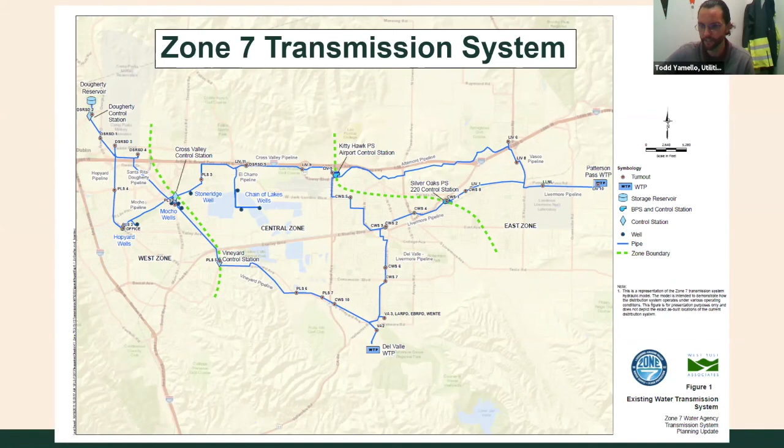So the next slide I have here is the city's system. You can see the red dots here are the 7 turnouts that Zone 7 delivers water to our system. The table on the right kind of tells you the percentage of water that comes in each of those turnouts. And then we also have our 3 wells, well 5, 6, and 8, and we have the percentages there, which also tie directly into our system.

You could tell T1 and T2, we very rarely use those. They're just not needed for us hydraulically. They don't deliver much water in our system. T2 we will bring on in an emergency. The majority of our water comes from T3, 4, 5, 6, and 7. You can see they're just kind of spread out through our system. And then our wells 5 and 6 are on Santa Rita, and well 8 is actually in our operation yard. So this kind of gives you a feel of where water comes in, and the percent. You could tell it's pretty evenly distributed, as you would imagine.

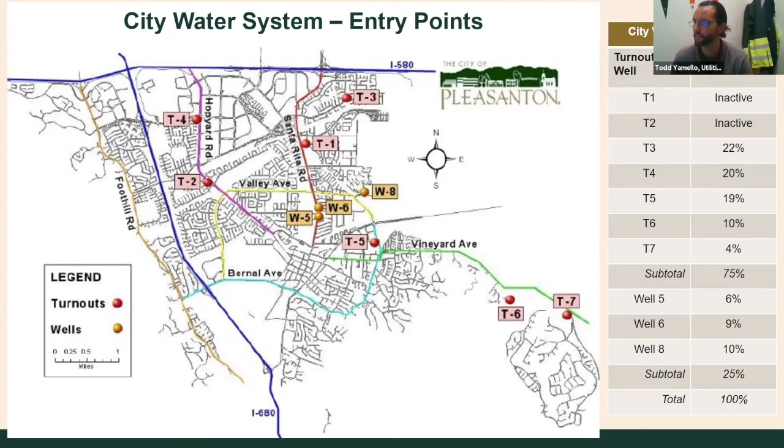I think there were questions as to how water gets distributed in our system. This map, I know it's a hard map to look at, but what you're actually seeing is not streets. You're actually seeing all our water piping. Essentially the majority of all our turnouts and wells pump into what we call our lower zone, which is all that area in green. And we have 2 large 8 million gallon tanks, one by Foothill, one by Sycamore, that help store water. That storage is to help with peak demands. As things fluctuate, we rely on our tanks. It helps us with fire flow. It helps us with emergency storage. So the majority of the water comes into this lower zone.

And then all these little different color areas that you see on the west side and even on the south side, those are higher elevations. So we take water from the lower zone and we pump it up to the higher zones, and each one of those zones has tanks. In total, we have 18 pressure zones, 20 reservoirs, and 14 pump stations. So we're literally taking water from Zone 7, storing it, and then pumping it up to all the different pressure zones where it could be used and stored. So that's the other thing we wanted to point out.

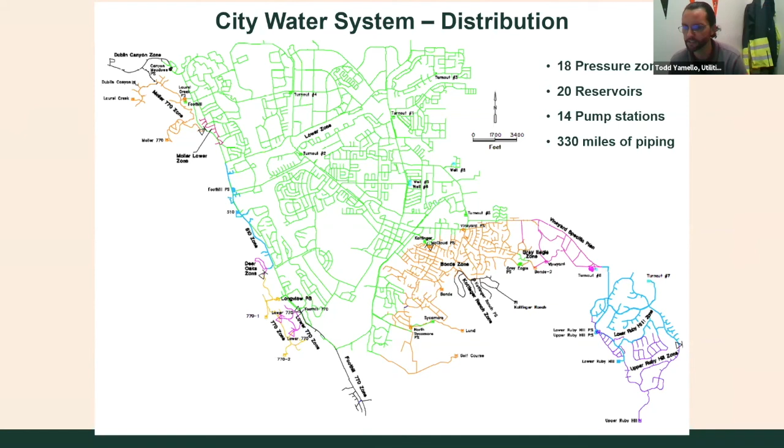So just a very quick overview. Obviously, PFAS is not regulated yet in California in terms of having an MCL. But that is underway, and there are recommendation levels in place that do provide some guidance, and in fact, even some requirements now with the passing of certain recent assembly bills.

So currently, California Division of Drinking Water has issued notification levels for 2 of the major PFAS. I think, as everybody knows, there could be up to 5,000 PFAS chemicals. 2 of them are heavily studied, PFOA and PFOS, and there is probably another 15 or so that are trailing behind in terms of the study of it, the science of it, and the regulation of it. So for California, the notification levels for PFOA and PFOS are 5.1 and 6.5 respectively.

And so this notification level is what is required for Zone 7 or the city: if we test above this, we have to notify city council or the governing board so that they are aware that we basically have this chemical in our water supply. There's no recommendation to shut down the water supply based on this level. It's a notification essentially that you do have this in your system.

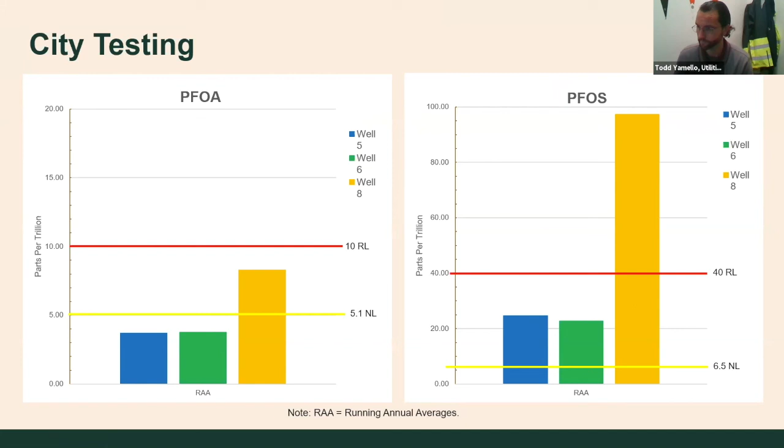So I wanted to jump in, what are the impacts of PFAS? So you're going to have impacts to Zone 7 and their supply, and you're going to have impacts to the city and their supply. And obviously Zone 7 supply impacts all of Tri-Valley as well, right? So for Zone 7, future PFAS regulations will likely impact the Chain of Lakes wells. As those numbers come down, they will have issues with operating their Chain of Lakes wells. The Mocho wells, because of the demin plant, they will likely be able to treat and meet any future regulations. It's really the Chain of Lakes wells that are going to be a problem.

So what are the impacts if they shut down their Chain of Lakes wells? And this was at one of their recent board meetings. These 3 major bullets were, 1, it would reduce their groundwater supply by about 25%. So although they have groundwater at other locations that are either not impacted by PFAS or can be treated, you can't just simply make up for it because of where it's at, right? You can't overpump one area, you get localized issues. So they would basically be looking at a groundwater reduction of 25%, and they would be more dependent on surface water for that additional 25% to make up that difference in groundwater.

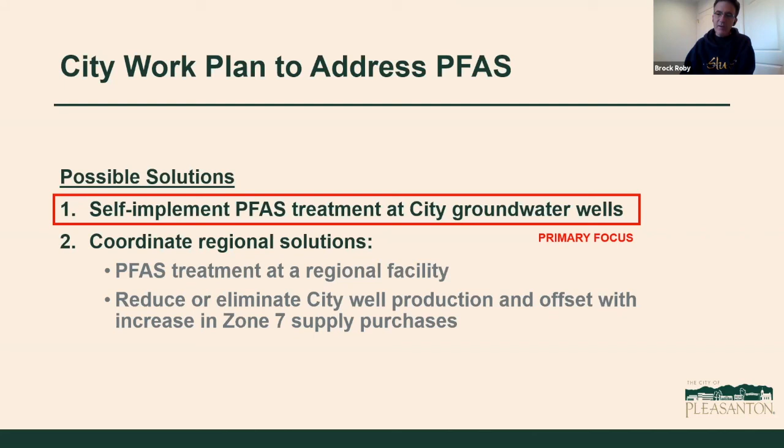Yes, great. Thanks, Todd. I have a couple quick technical questions, and then what I would say a couple fun ones. Just for clarification, PFAS is only in groundwater, right? So we're not worried about any surface water, State Water Project. There's no PFAS there, correct? Correct. For our source, PFAS has been tested in the surface water and was not found in there.

Okay. And we do have some wells that are consistently over the notification level. Does city council announce that at each of their meetings? Is it in the agenda, or how often is it? So I don't know that it's announced at each council meeting, but there have been 2 or 3 council meetings where we have presented numbers similar to what you saw today. It's also on our website. Data for Zone 7 and the City is posted on the website.

And I can't remember what month it was, maybe Kathleen will remember, but we actually did a whole public notification process where we mailed a PFAS flyer and data to every one of our customers. So there was a very conscious effort by the city to get this information out there. Honestly, it's not required to do that because we have shut down our wells that were over the response level. But the city just did that anyway.

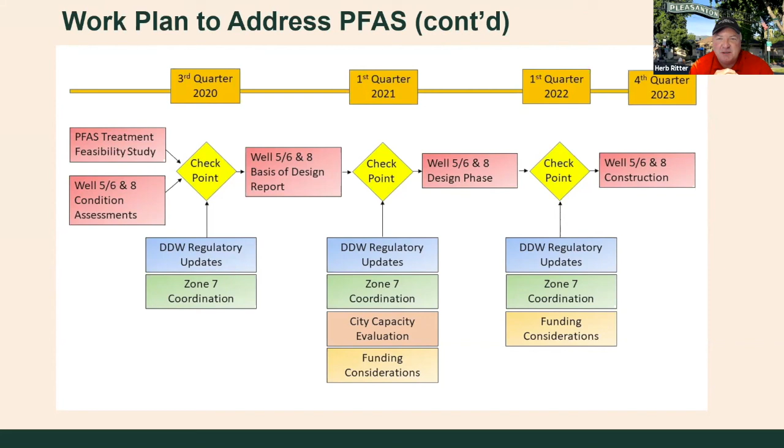Herb, I saw your hand next. Yeah, thank you, Kathleen, Todd, and Dan. Great information. With the state mandated RHNA numbers coming out and the forecasts with the water supply, we always get questions. How can we add more houses if we have no more water? Are we budgeting for what the mandate's telling us we're going to have to do within our water system?

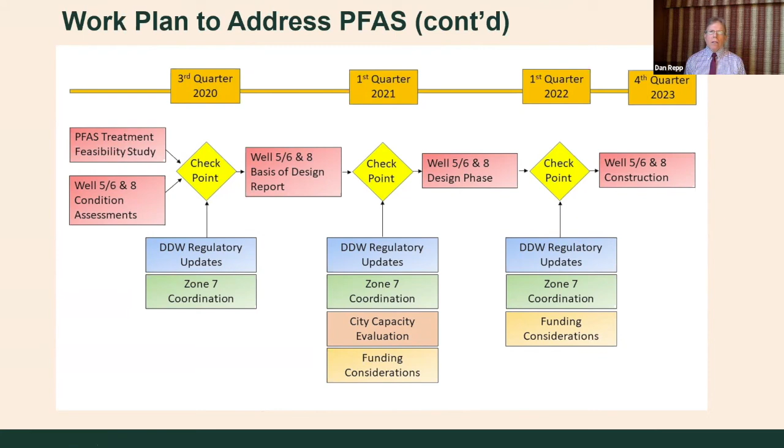Yeah, so maybe I'll take that on. Right now, Zone 7 is in the middle of the demand study, and they're looking at precisely that. Zone 7 looks at the regional demands and is projecting those build-out numbers, the ones you're talking about, and that goes into all their supply estimates. So the language we use in the water world is supply planning and demand planning, and we mush them together and just call it supply and demand planning. So that's what's going on there. It's pretty intuitive.

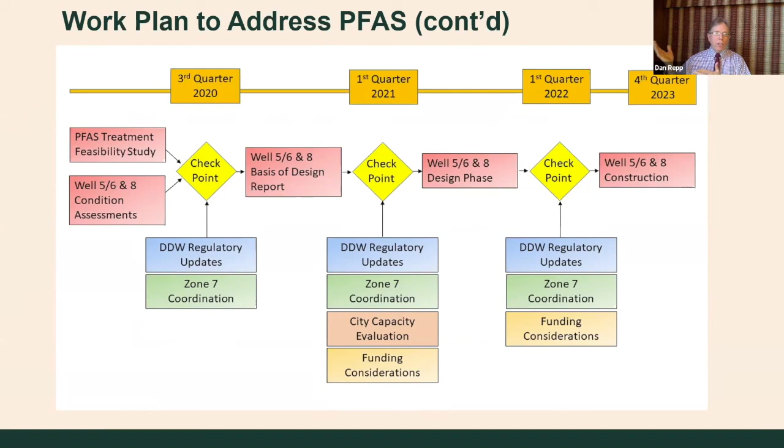So that planning is regular. I don't know exactly what the cycle is for Zone 7, but it happens every couple of years or some known interval of time. So for the City of Pleasanton, what happens with the retailers, so Pleasanton, Livermore, Dublin, we have a closer look at what's going on with the population growth within those areas. We're feeding information up into those planning efforts. We're talking to our planning department, looking at projected increases in numbers, and then collectively we're feeding that up to Zone 7. So there's a collaboration that goes on during these demand and supply planning exercises.

So to answer your question, the answer is yes. We are looking at the future build out, and typical water supply planning is based on that expected build out, and so that's always the target we're looking at, and that happens across the years.

So as that changes, adjustments are made. So regarding the supply piece, which is what we opened up with, what Todd started talking about originally, what happens with allocations from the state. One of the things you saw there is that because the allocations do vary, you're at 20%, and right now it's 20% for Zone 7. But again, those numbers are flexible.

But what everybody sort of looks to is that some years you have good years, some years you have bad years, and then there's some storage going on, and so generally across time we're still okay in a lot of those numbers, and that's how the planning is worked out. And then there's analysis that goes on top of that, which is what happens if things go really bad. You're in a multiple year drought, things like that, and then the layer that goes on top of that is what they call conservation measures. So that's where you'd be looking for reductions in use from customers.